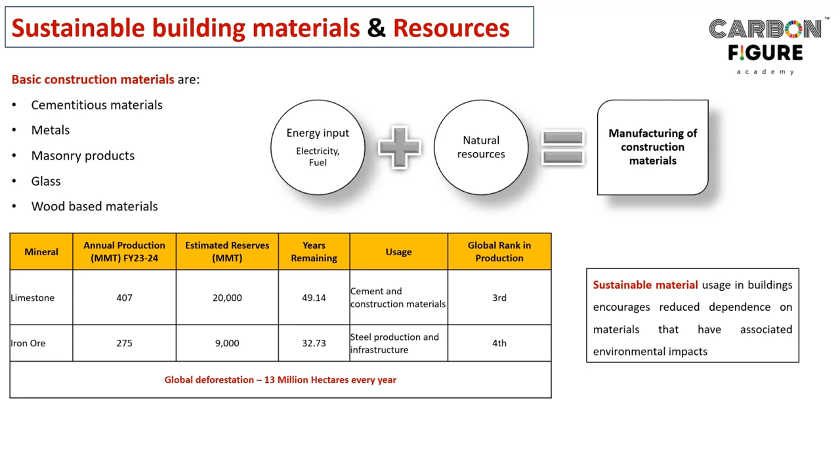From that whole building perspective, there are certain criteria or focused areas listed, under which when we implement certain degrees of activities, it can contribute to the building as a sustainably built building or built environment. Again, their usage in buildings encourages reduced dependence on virgin materials that have huge amounts of associated environmental impacts.

So what are the focused groups? As per IGBC framework, building reuse is the very first thing. Then reuse of salvaged materials. Then materials with recycled content. Then local or regionally sourced material. And finally wood-based material, which means wood must be responsibly produced wood, what this means we will see.

It is like an order of activity. First you should try not to demolish a building for the purpose of building a new one. You try to reuse the existing one, that is the first scenario.

If it is a plain land and you are going to construct a new building, try to use salvaged materials taken out from old buildings, that is the second order. Third, if you are going to use new material, try to get materials with reasonable recycled content, not completely virgin material.

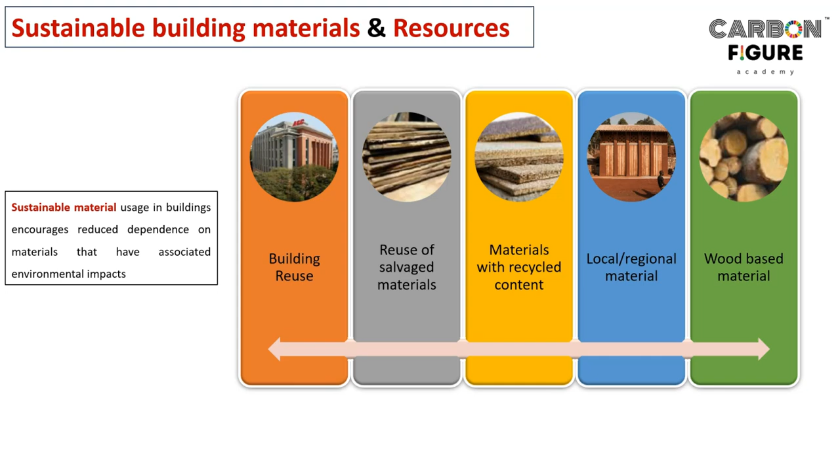That is the first thing. Second, with respect to new material, try to get it from local sources. Don't go far beyond to get those materials, because that would involve more transportation impact. Then the last degree of suggestion is to go for wood-based material, especially from responsibly grown forest areas, which means renewable wood. Whatever can be cultivated within a span of 10 years can be termed as renewable wood material.

So the first thing is building reuse, try to reuse structural and non-structural elements of the existing building.

Ensure that they are retained. Then perform a detailed building survey to identify the extent of reuse, because not the entire building might be useful for your intended purpose. So take a clean survey and try to come up with some identification, so that these zones can be converted successfully with respect to our intended new building purpose.

So these zones, if they cannot be used for the main purpose, can be used as a storeware or storeroom, or some server rooms in case of IT companies, or all those things.

Then structural elements - columns, beams, floor slabs, exterior walls, structural glazing, etc. This is what they meant as structural elements. In case of non-structural elements, they include interior walls, ceiling, flooring materials, doors and windows, etc.

So in the given picture, they have given a typical example of reusing the existing building as a new one. From left to right, you can see the changeover from the existing scenario to the newer one. It just looks like it gets upgraded. That is nothing but Ambuja Cement Corporate Office, which is located in Gurgaon.

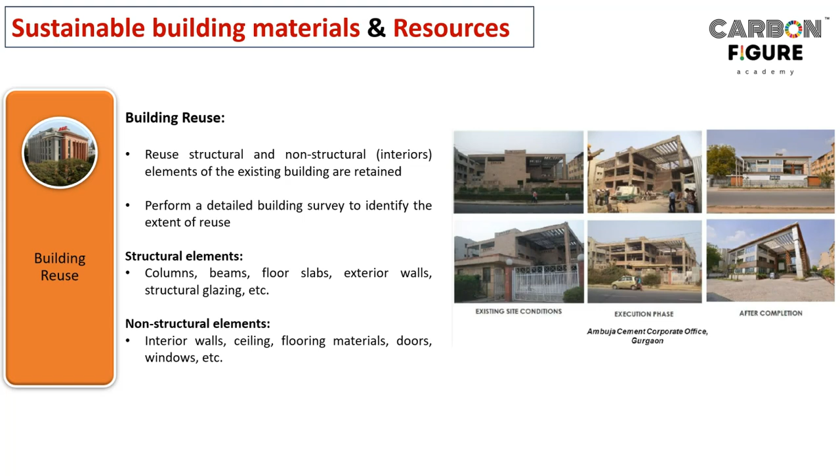Then reuse of salvaged materials. So materials that were used in the buildings are salvaged or reused or refurbished material - that is the definition of salvaged materials. Which means the existing building might be demolished or out of use, so whatever possible extraction can be done.

People do it, and they just send it to the local market for some resale. From that kind of reselling point, you try to get certain materials for the purpose of your own new building or interior development of your existing building, whatever the purpose. For a simple example, the frames or the doors from the previous old building can be successfully reused in your proposed new building - that would be the simple example.

Then verification of durability and performance is very much important, because not all the materials from the old building can be straight away used for some important purpose in your new building, like the load bearing aspect. So especially when you would like to take away columns or beams which are made with wooden components, they should be checked for durability and adequate performance. That is very much important.

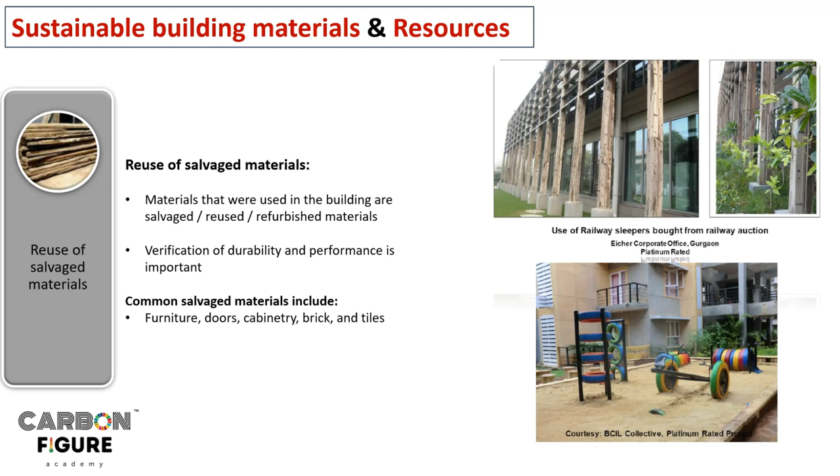Then materials with recycled content. So what they are suggesting, use materials with recycled content, which reduces dependence on virgin materials. Obviously recycled content decreases the virgin ratio.

Then types of recycled content are there. So when you mention recycled content, it might indicate two different things, which is post consumer recycled content or post industrial recycled content. So if you are claiming your building product holds recycled content, you should be able to specify whether it is post consumer or post industrial.

So what is meant by post consumer waste? It is the waste material available after the consumer use. Example, a tetra pack, used bulb, plastic covers, all those things.

Post industrial waste means the waste material that is generated during the manufacturing at the site itself, which means the plant itself. For example, fly ash, particle board, wooden cut pieces, or those kind of things, especially from the manufacturing yard. So post consumer waste as well as post industrial waste can be successfully reincorporated in the manufacturing of new materials or new products.

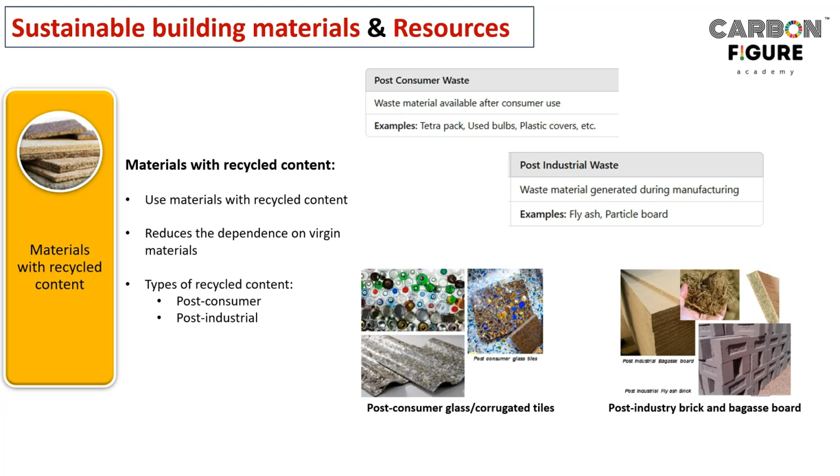Accordingly you have to get the data and just put it into the formula and finally show up the number - okay, these many different materials all together, my new building is going to use this much amount of recycled content for a given floor area, or like that. You can specify it in that way.

So we can see here how it is getting calculated.

Typical building materials have recycled content in the market. Fly ash blocks have 30 to 40% recycled content. Glass has 10 to 15%, though I wonder if it could be more, but it's still mentioned this way. Ceramic tiles have 20 to 30%. MDF, which I think has some plastic content, has 30 to 50%. Steel and cement have 25 and 20 to 30 percentage respectively. Nowadays people are going with more, up to 95-97 percentage for steel, but this would be the industry average or existing scenario.

So how do we arrive at the recycled content? How do we do it for a given material and for the entire project?

For a material, the recycled content equals post-consumer content plus 50 percentage of the post-industrial content. So recycled content comes in two ways: post-consumer and post-industrial, and they are added together. But why do they consider only 50 percentage for post-industrial waste? Because it is comparatively easier to recycle post-industrial waste into manufacturing of that particular product, since that waste emerges in the manufacturing plant itself. But post-consumer waste happens outside the manufacturing plant, at the end of the product life cycle. So reusing it has more significance and more effort behind it. To acknowledge that, they account 100 percentage of post-consumer waste, whereas they account only 50 percentage of post-industrial waste.

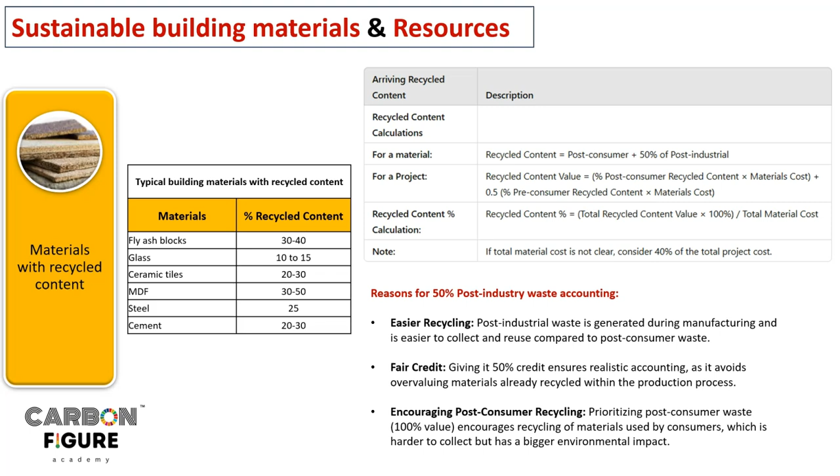Then local and regional material preferences. This tells you to try to choose materials that are manufactured locally. The definition for being local is within a distance of 400 kilometers to the project site. So if you have a project site at a particular location, keep that as a center and draw a circle of 400 kilometers as a radius, not diameter. Within that circle, whatever the surrounded areas are bounded with, if you collect or purchase your materials from there, you can call them locally sourced materials.

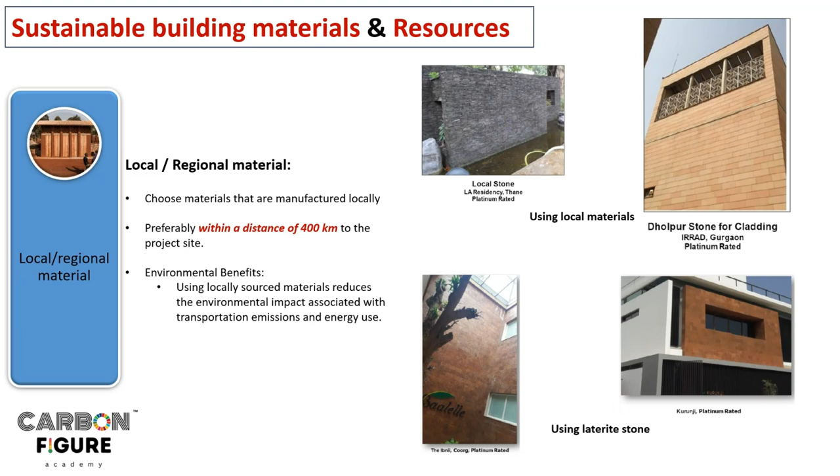What is the environmental benefit? Using locally sourced material reduces the environmental impact associated with transportation emissions and respective energy use. There are certain examples like local stone for cladding and security wall construction, and facade establishment with locally available different types of stones and blocks.

Then wood-based materials. We have composite wood materials. Use engineered or composite wood products for durability and sustainability. Avoid pure wood products like teak wood and rosewood. Instead, try to prefer composites such as MDF and plywood.

Medium density fiber, I think so, MDF. Then rapidly renewable: prioritize materials derived from resources that regenerate quickly. Then certified wood: ensure wood is certified by FSC or PEFC. FSC means Forest Stewardship Council, and PEFC means Program for the Endorsement of Forest Certification.

So that's what I was mentioning, like responsibly grown forests. In those areas, the forest is governed exclusively for extracting construction products, right? So they will be highly taken care of, and they are bounded within a certain region, and it's not some random forest, and they have a high governance body so that whatever amount of wood has been extracted will be replanted immediately.

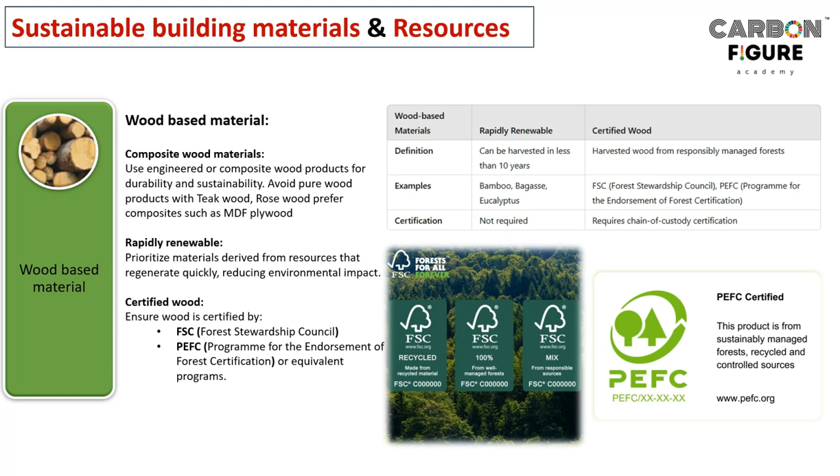And there are certain IS codes I would like to mention here, where bamboo is preferred as an alternative for the reinforcement bars inside concrete elements. Normally people use steel reinforcement bars. Nowadays in the market we can see fiberglass based reinforcement bars, completely glass and plastic polymer, coming up as an alternative with huge potential for better structural properties than steel. But apart from the plastic and fiberglass option, there is an option of going with bamboo as a reinforcement bar inside the concrete. And India has its own IS code with complete case studies, examples, calculations, guidelines, everything, right?